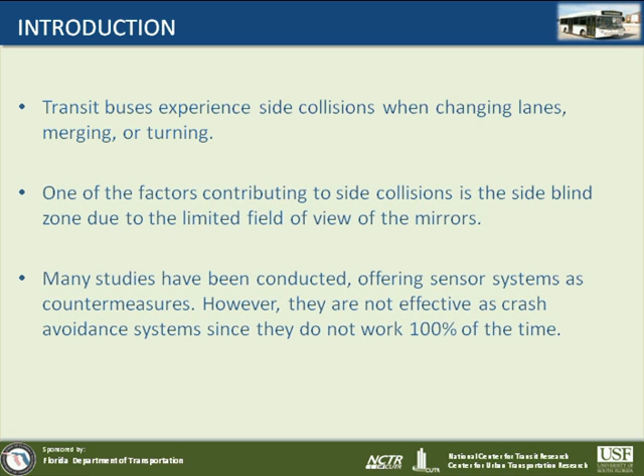If we look at the crash data, this slide shows, as you can see on top, data based on the National Transit Database crashes in 2002. From this table, you can see the initial point of impact during a crash - 46% is either on the left side or the right side of the bus. Among these side crashes, 14% are fatal crashes and 36% involve injuries. So you can see crashes at the side of the bus are the majority.

The next table compares collisions involving transit buses with all crashes occurring in all modes. From here, you can see collisions with vehicles - sideswipe is 33% for transit buses. This is further evidence showing how important it is for transit drivers to see vehicles, pedestrians, and other objects on their side.

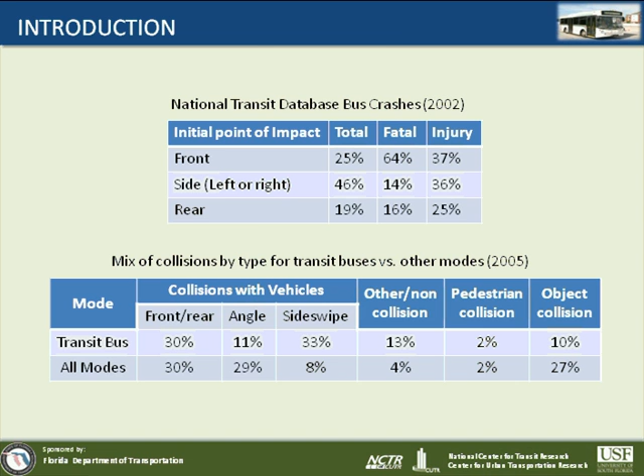Moving to the next slide - based on the information and the needs, our research team came up with the methodology shown on this slide. First, we would like to conduct a literature review and compare the existing mirror system, the sensor system, and the camera-based system. We try to compare those to see the pros and cons, and how we can improve the system to better eliminate the blind zone area.

After the literature review, we perform what we call volumetric measurements. We know that based on the no-zone area on just the flat mirror, there's a certain place the driver cannot see, and not just in one dimension but two dimensions. We like to look at three dimensions, so that's why it's called volumetrics. There's a certain part of the no zone in the volume, and we use the area for the flat mirror as a baseline and try to test it out.

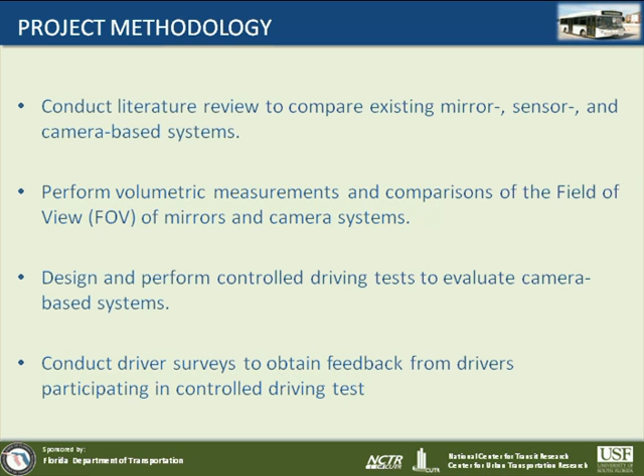Based on the literature review, we found out that the current mirror system, basically the flat mirror plus the convex mirror, still leaves a big blind zone area around the vehicles. The sensor system will, from time to time, provide some false alarms, and it becomes distracting to the drivers, and they cannot provide 100% reliability all the time.

There's some study that uses the camera system, using machine vision, basically trying to use the camera and the image to detect vehicles around the transit buses. But so far there are very limited studies on the side view camera, and there are several small studies on commercial trucks, but for transit buses this study is kind of like a pilot. It's a pioneer study we conducted, and we learned a lot from this pilot study.

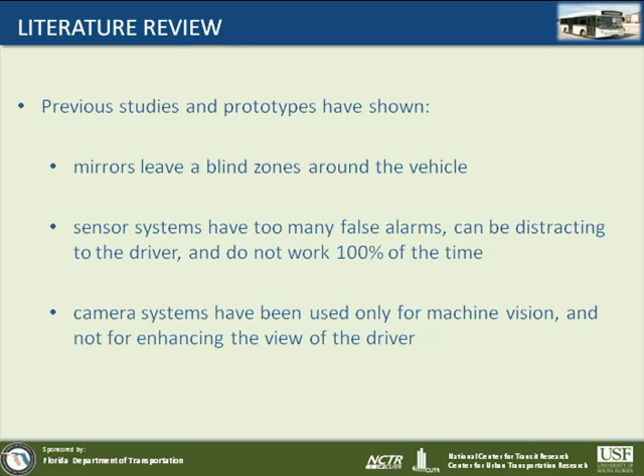The next slide gives you a quick overview about the mirror field of view. Based on the mirror, on both sides, left and right, you can see the area here on both sides - this is the flat mirror field of view. And a little bit darker, the gray area is the field of view for convex mirrors. These are the standard mirrors for transit buses - we have the flat mirror on top and the convex mirror under that.

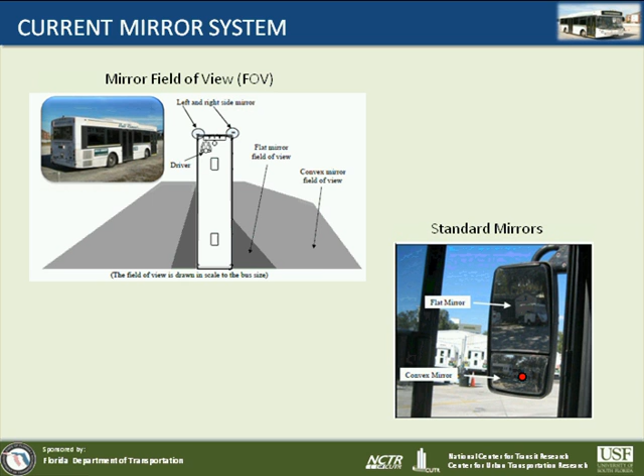This just shows you the one I mentioned earlier about the sensor-based system. Basically they have a sensor kind of around all the vehicle to provide detection about the vehicles around them.

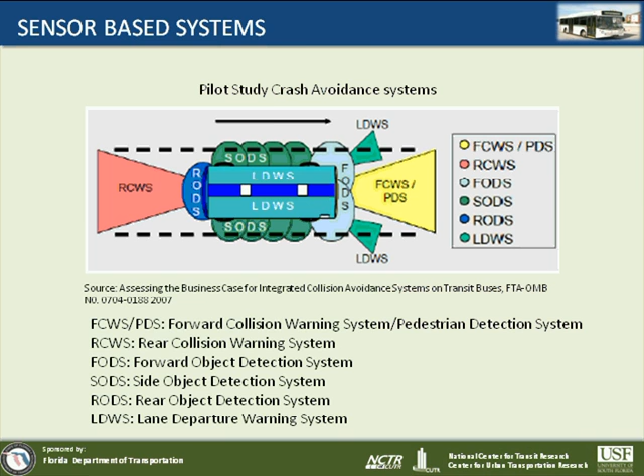The first measure we conduct is, as I mentioned earlier, we try to measure when we use the convex mirror, regular angle lens camera-based system, or a wide angle lens, and compare the percentage reduction of the no-zone area in the 3D dimension. As you can see from the table, the flat mirror is used as a baseline, so there's no reduction on the no-zone area. But when we use a convex mirror under the flat mirror, there's a 40.8% reduction on the left side of the transit bus, and on the right side there's a 35.1% reduction. When we use the regular angle lens, you see a much bigger reduction - 64.4% on both sides. And when we use wide angle lens, it can reduce up to 100%.

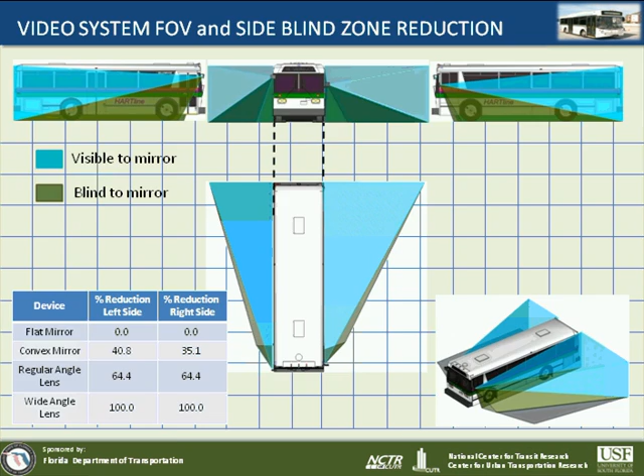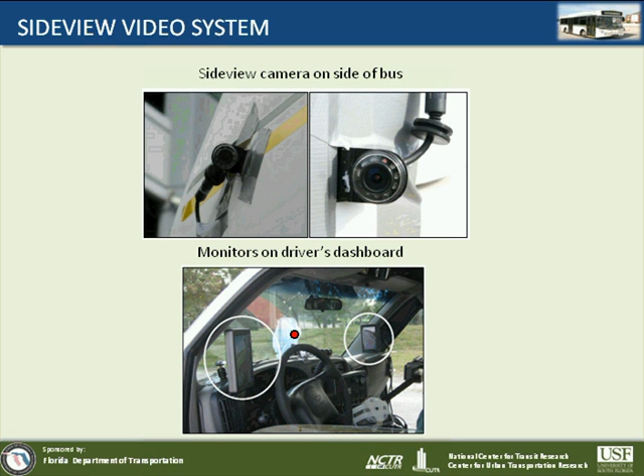And so next we'll move to the control driving test. Let me first describe our objective.

The first objective is to test whether the driver can perceive distance similarly using the mirror versus the camera. We ask the driver to drive the vehicle in a designed scenario and see whether the transit driver can use the camera alone to drive, compared to the mirror.

The second objective is to test whether the camera system can help the transit driver eliminate the blind zone area.

The third objective is to examine distance perception, because this is very important - whether the driver can perceive similar distance using the cameras, or side view system, compared to the mirror.

Finally, we try to collect feedback from the transit drivers, to see how they feel about using the side view camera system, and how we can enhance the mirror or camera system in the future. There were a total of 28 participant bus drivers for this control driving test.

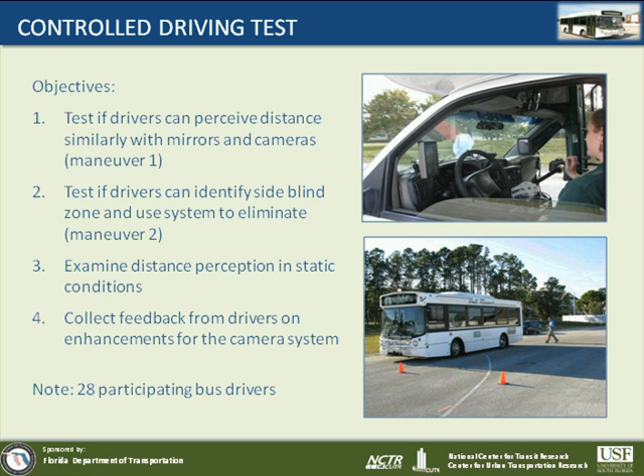The first picture shows a facility near the University of South Florida. It's a very large, paved area, so it's actually a very good environment and location for the control driving test. There's no other vehicle here.

As far as the transit drivers participating in this study, their age is mixed, from under 25 to more than 50 years old, and their experience driving transit buses ranges from half a year to 52 years.

Two types of transit bus were used for this study. One is what we call cutaway, which is kind of a shuttle bus, and the other one is a low-floor bus, as you can see here.

Another point about experience: 11 drivers out of 28 had previous experience with the rear view video system, so they are more familiar with the video system.

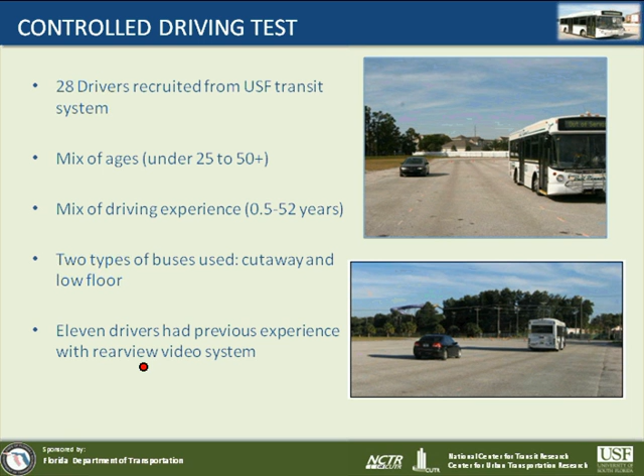So next, I'm going to turn this over to Achilles to talk about the details of the control driving test, as well as the survey we conducted and the results from the survey. Thank you, Dr. Lin. Good afternoon, everyone.

I'm going to continue with the control driving test details. As Dr. Lin said, this was a closed course, so no other vehicles were involved. We set up this course that you see in the slide right now. We had the drivers driving around the loop twice just to get familiar with the system, since for some of them this was the first time experiencing this kind of system. We wanted them to become familiar and see how much they could see and what they could see.

When the drivers were driving around, the course was set up with transit cones, as you can see in the pictures on the right side. After they felt comfortable, we started doing the two driving maneuvers we explained before, and finally we did the test under static conditions - basically the bus was stopped, and I'll explain more about that later.

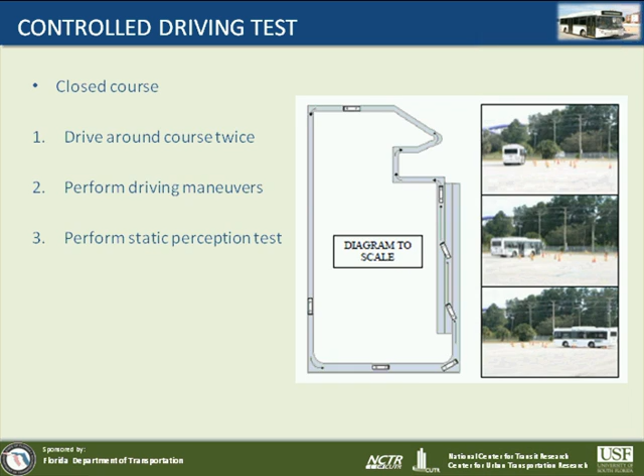For the first maneuver, we set up a 3-lane section, with the bus in the middle lane and a second car driving either to the left or to the right. We did both sides, and we asked the drivers to tell us the last moment they would actually change lanes in front of the oncoming vehicle.

The bus was driving at a constant speed of about 15 miles an hour. The vehicle started behind the bus and was slowly accelerating to pass it, next to the bus, as you can see in the first two pictures - on one side the vehicle would pass right next to the bus, and on the other side it would pass on the right side.

As the vehicle was coming up behind the bus, we asked the drivers to let us know when was the last moment they would actually change lanes in front of the vehicle. No lane change was permitted, obviously, for safety reasons - we didn't want any crashes involved - but we found a way for them to let us know when that would happen.

The idea was to capture the distance between the vehicle and the bus at that moment. So when the driver told us, 'right now I would change lanes in front of the car,' we measured that distance between the vehicle and the bus.

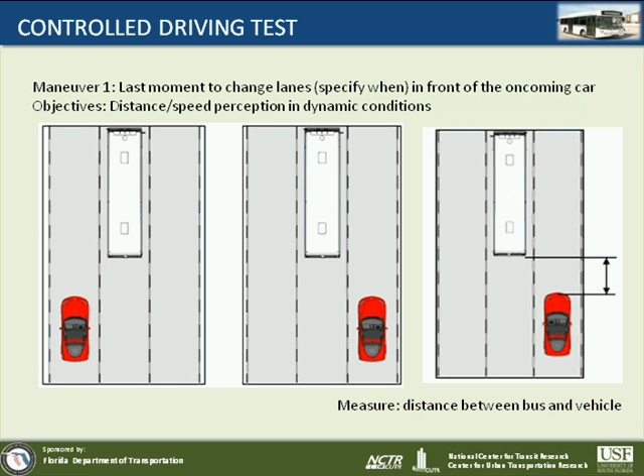And that's how we did this maneuver. I will present the results later.

Now we placed the vehicle on the lane adjacent to the bus, so it wasn't right next to them. Assuming a scenario with a 3-lane section, both the vehicle and the bus were planning to merge in the center lane. If the vehicle is located right where it is now, it's questionable whether the driver will be able to see the car.

And if they both change lanes, even if the vehicle's driver is not attentive and they change lanes at the same time, you're going to have a sideswipe crash.

In this case, we are placing the vehicle not right next to the bus because obviously the driver should be able to see there. Although there is still a gap, as you can see, this whole area is the blind zone we're talking about. If the driver's door is located in the lane next to the adjacent lane, the problem becomes bigger because it's completely in the blind zone. So that's what we're trying to show.

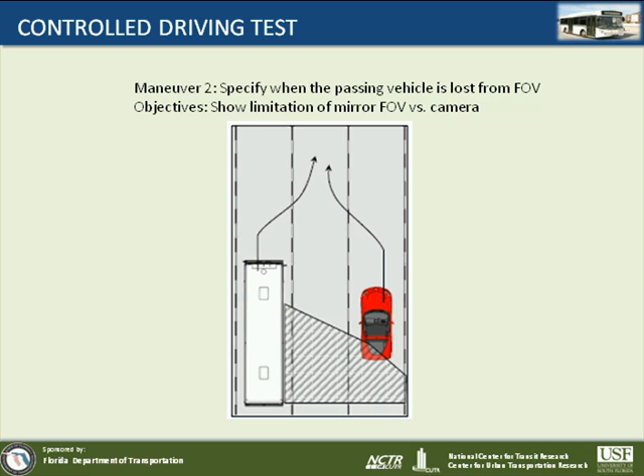The last test was a static test. We had the bus stopped, and had the researcher stand in a specific location, both left and behind the bus. We used 2 dimensions, and did this for both sides, left and right. We asked the drivers to tell us where they thought the person was standing, and how far behind the bus.

Each driver responded, and told us the 2 distances shown here: how far behind the bus they thought the person was standing, and how far to the left or right. We did this for both left and right sides. The idea behind this test was to capture how well drivers can see and perceive distances in static conditions. Again, we did the test twice, once with mirrors and once with the camera, to see if they could understand the distance correctly or similarly to the mirrors.

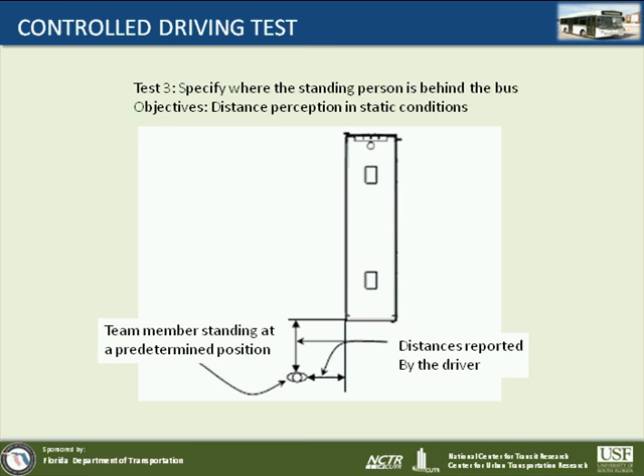During the test, we had to collect our data. As you can see on the left image, this shows the cameras we had. We had a total of 4 cameras installed. One was the left side camera, which was visible to the driver via a monitor.

What you see on the right side is the schematic. Camera number 1 was shown in this monitor here. Camera number 2 was the right side camera, located, as Dr. Lin said, close to the wall of the bus in the far front, and we had a monitor placed on the upper right corner of the bus to show that camera.

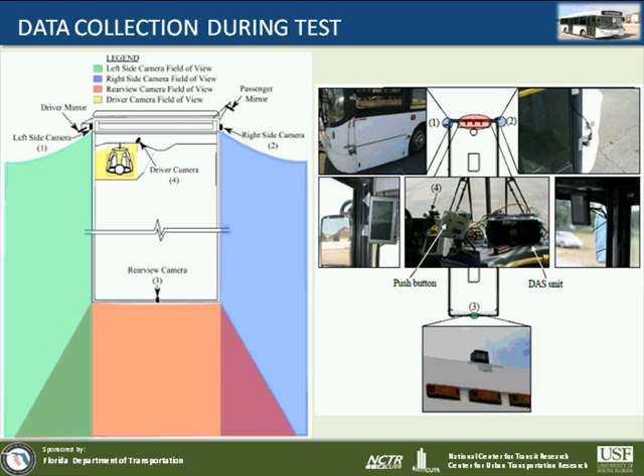Camera number 3 was a rear view camera placed on the back, used to collect data for distance measurement, which I'll explain later. We had a 4th camera placed right here, looking at the driver. It collected two kinds of data: one was to see which mirror or camera the driver was looking at, and also to capture the moment they told us when they would change lanes in the first maneuver. I'll explain how we did that in a second.

These are the views of the cameras. On the left side here you're going to see this is the left and this is the right side camera view as the drivers were looking at it. This is the rear view camera, which we use to collect our distance data. And this is a snapshot of the camera looking at the driver.

As you can see, we have the driver here, and we had placed a push button with an LED light. We asked the drivers to push this button so the light would go on, and we would know exactly when they thought, as in maneuver 1, that they would change lanes in front of the oncoming vehicle. So instead of changing lanes, they just pushed that button.

The light came on, and at that point we had a snapshot of the rear camera taken, as you can see on the left.

Now, the way we measure the distance, we had previously made a scale. As you can see, we placed the scale on the ground. And this is a schematic here. The camera, so this point here, let's say 20 feet behind the bus, is this point right here. It's the same point as where you can first see the first line.

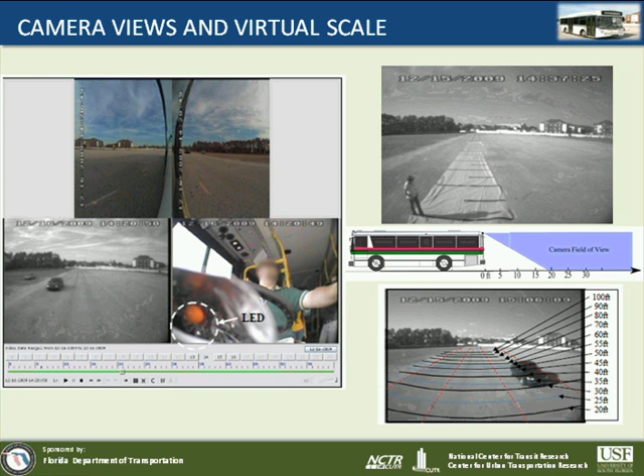So this is the results of the first maneuver. Just to recap, the maneuver was basically asking the drivers to tell us the last moment they would change lanes in front of the oncoming vehicle, and we recorded the distance between the vehicle and the bus.

We also calculated, based on safe stopping distance, what was the minimum distance safe enough to actually change lanes and not force the vehicle, if it had to stop behind the bus, to crash into it. It would need about 32 feet.

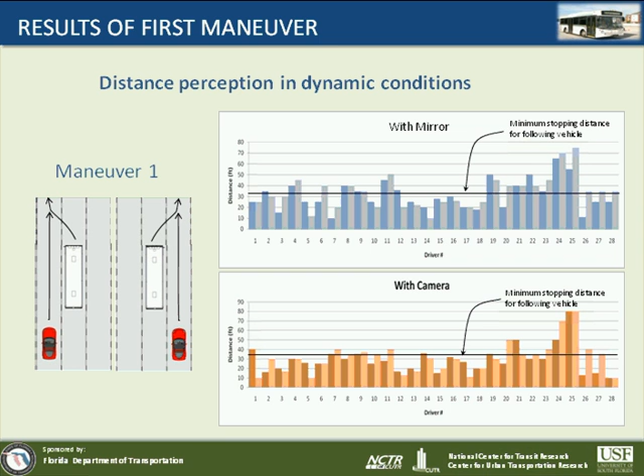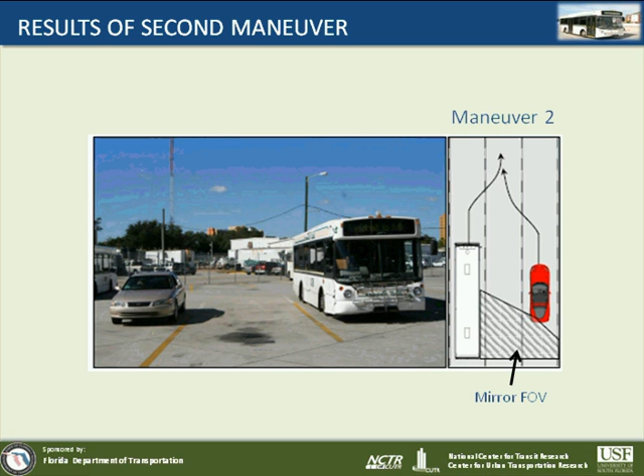The next result shows the second maneuver. As I said, the picture shows where the vehicle and the bus were. This schematic on the right side shows how it happened. So these are the results of this test.

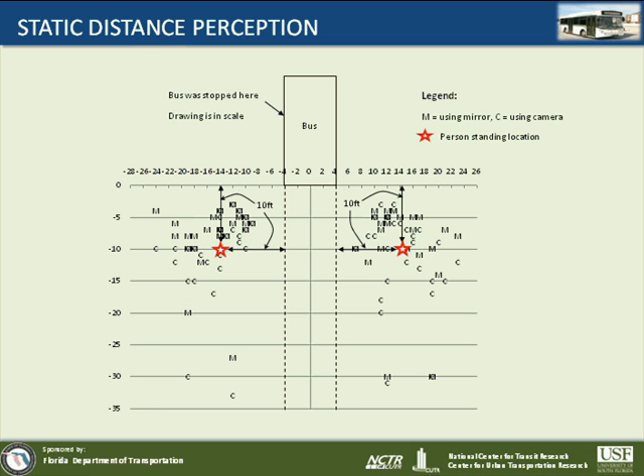And for the survey, we asked the drivers at the end. We had 8 questions before the test about how they think the system is going to perform, or what it is, and 16 questions after the test.

The questions dealt with the effectiveness of the mirror system in rain and night conditions, what they think about it, and its limitations. We asked about their crash history in the past, specifically sideswipes or side crashes if they had any. We asked about previous experience with camera systems, because this is important. We also asked them to tell us their perception of the system, how easy they thought it was to use before and after, and how much time it takes to adopt and be able to drive. We asked what they think the system can help with for bus safety, and left it open for them to give us comments and feedback on how we can make it better.

Now, this is not all the questions. Obviously, this is just a summary.

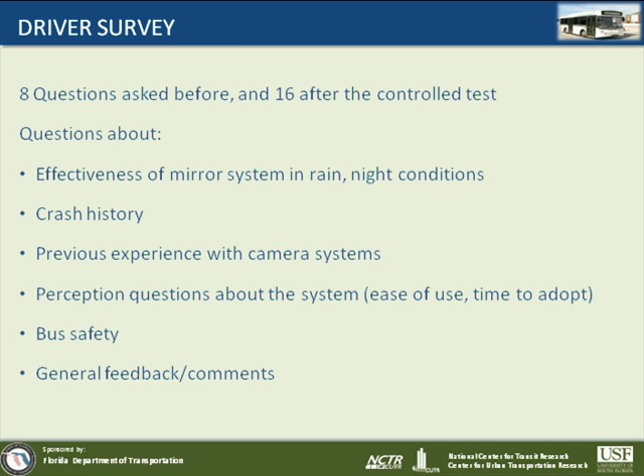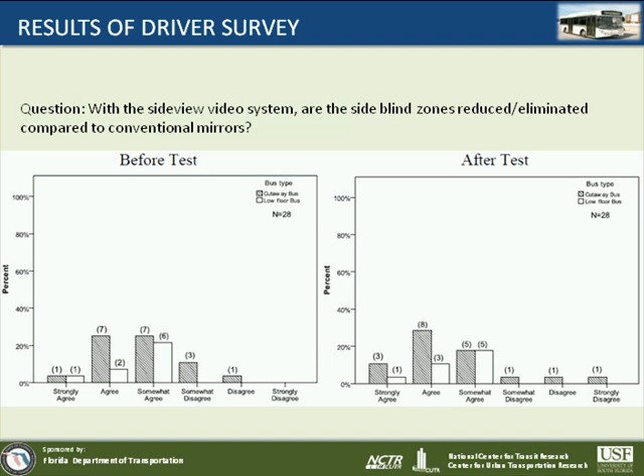Some of the question replies, as you can see here. One question was: with the side view video system, are the side blind zones reduced or eliminated compared to conventional mirrors? The answers shown are before and after the test, and the two columns represent the two types of buses we used, the cutaway and the low floor. As you can see, a majority of drivers, both before and after, agreed that the side view system eliminates or reduces the blind zones. After the test it was slightly more, and this is what we were looking for, to see how their opinion changed.

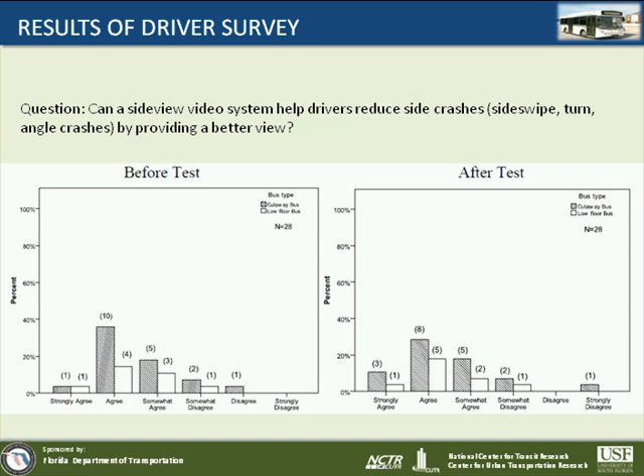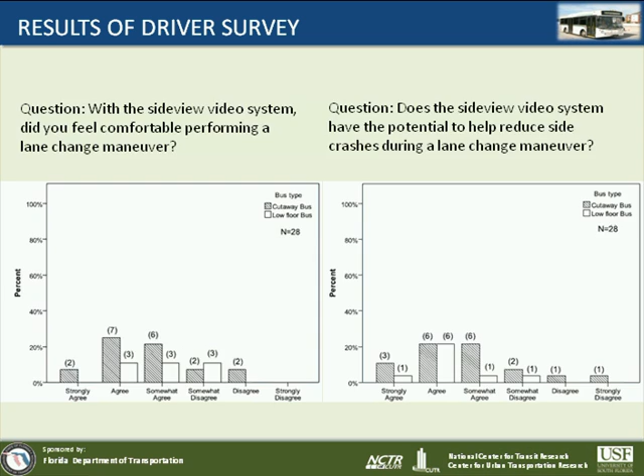A summary of the results here: the drivers did agree that the system reduces or eliminates the side blind zone compared to the mirrors. It also helps by providing a better view. In general, the system can improve bus safety.

Also, some things we asked the drivers about—they can actually observe late arriving passengers. Sometimes passengers miss the timing and run after the bus has already left the stop. They said sometimes you cannot really see them with the mirrors, and it might cause a conflict at a point that's dangerous for the pedestrian. With the camera, because they can see wider, they can actually see them coming from farther, larger distances.

Drivers would like to have this system on the bus they drive every day—that was one of the questions we asked. They felt comfortable performing a lane change maneuver with the system, and the system can help reduce crashes during lane changes.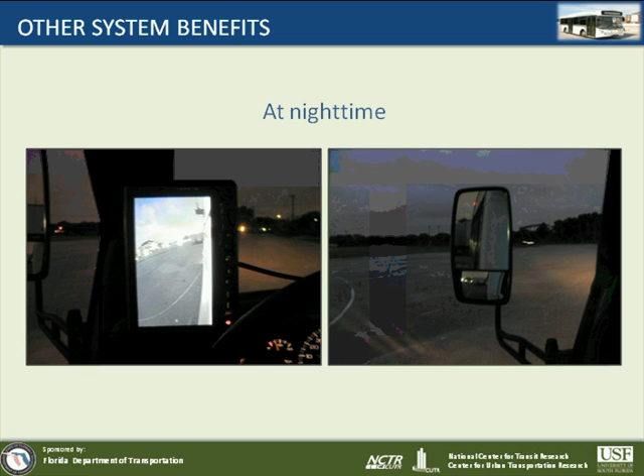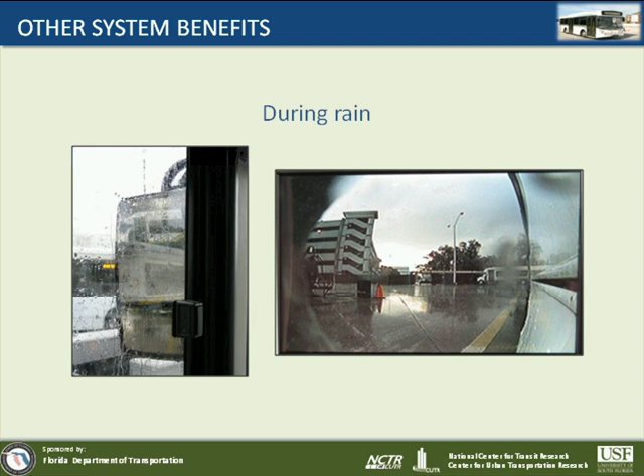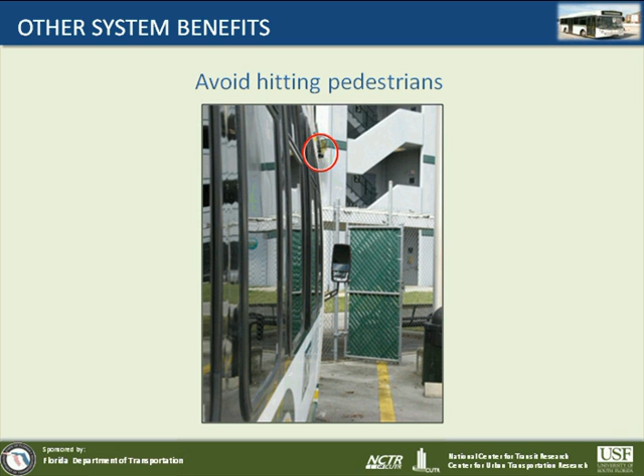The last benefit we found—as you can see here, this is a cutaway bus. The mirror extends quite a bit out of the side of the bus. This is actually one of the problems small transit agencies face, because this particular mirror doesn't meet height requirements and is actually dangerous—it might hit a pedestrian. We did have some instances where people were hit by a mirror like this. Using the camera instead, here's where we placed it on this type of bus—it has a footprint extending only about 1 inch from the side of the bus, so it's not a problem wherever you place it along the side. That was an added benefit.

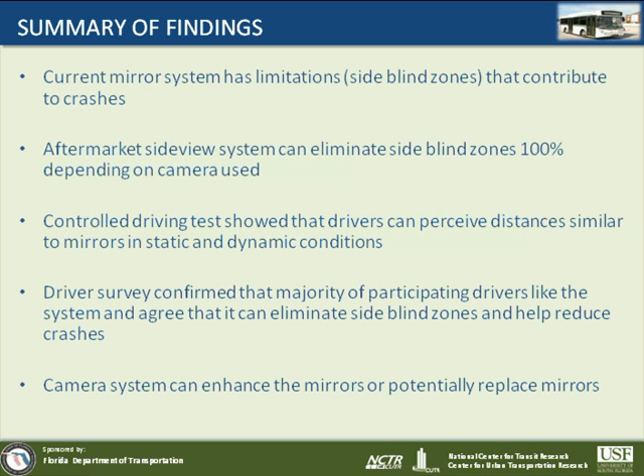In the next slide, I would like to let you know what our future work is about this research. Based on the findings from the study we just conducted, phase 2 was proposed. What we try to accomplish in phase 2, first, is to investigate what would be the best setup and specification for the enhanced side view systems, such as where should we place the camera, what kind of monitor is better, should the size be bigger, how we should place it, and should the right side monitor be bigger than the left side because it's a little bit farther away from the drivers.

The second part of our work is we try to see, because the mirror provides good visual on both sides, and we all use that, and we're so used to the mirror, how can we integrate the camera with the mirror and use the camera system as a supplemental device alongside the mirror to provide an integrated system to help the drivers. We want to investigate that, produce a prototype, and provide recommendations to Florida DOT transit offices.